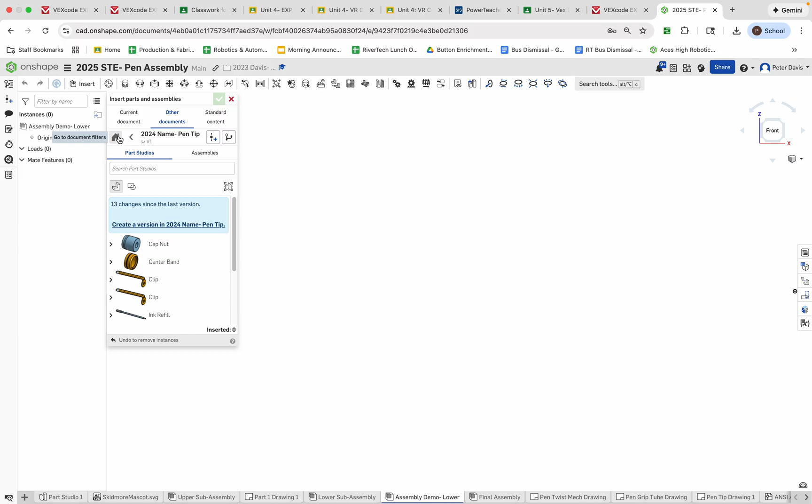All right, so I just called mine assembly demo lower. You don't have to change the name on it if you don't want to. First thing I want to do is I'm going to insert one of the pen parts. And so if you can't find your pen parts, you can always go back out to your home and you should see a listing of your documents. But if you're doing this in the same document, then it's probably going to show up in current document.

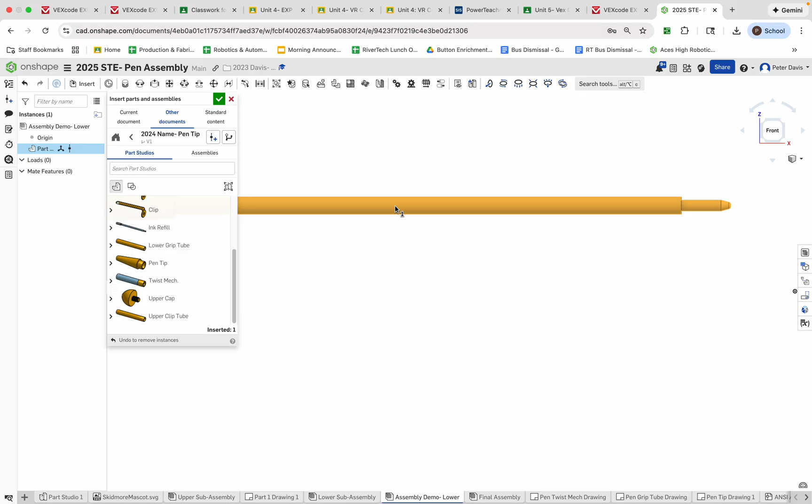So what I want to do is I want to pick one that's going to allow me to orient everything else around it easily. So I'm going to start with the ink refill as my starting point. Now, notice when I click on it, it automatically orients to the origin the way it was drawn. If I move my mouse over the design space, it would allow me to place it wherever I want. And that's not really what I want. What I really want is I want it to be oriented the way it was when it was drawn.

So if I don't move my mouse and click on anything, I can just go up here and hit check to automatically drop it. Now, as I mentioned a second ago, I can come back in here and I can grab this, move it, and that will kind of screw up my orientation for things. So I don't want to do that. I'm going to hit undo. What I want is I want to lock this to the origin. So I'm going to right click and I'm going to hit fix.

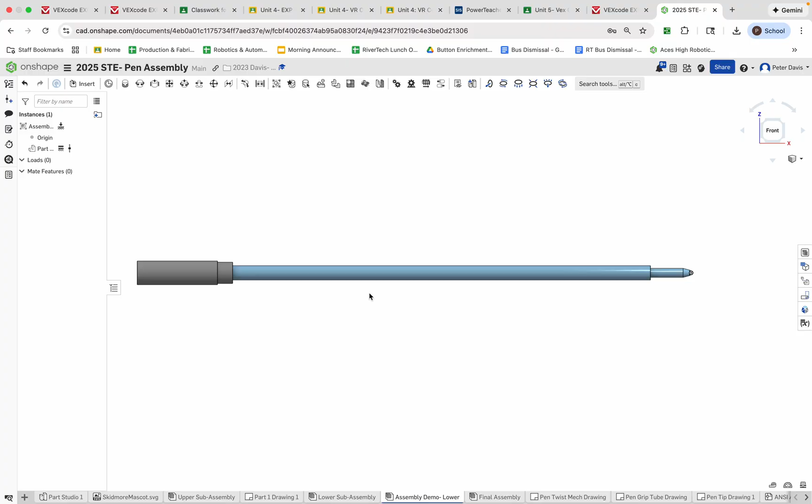So if you ever had any trouble getting normal looking front, top, and right side views because you were playing around in the origin and things got shifted and moved around, this is going to help prevent that from happening later. This is going to lock everything to the standard front, top, and right side that I used when I drew this originally. So now I'm going to bring in the rest of my parts now that I have that fixed. Again, right click, choose fix. If you hit unfix, you can always unlock it and drag it around. But in this case, I want to keep it fixed. And you'll notice the part is up here in my assembly tree and it indicates that it is fixed.

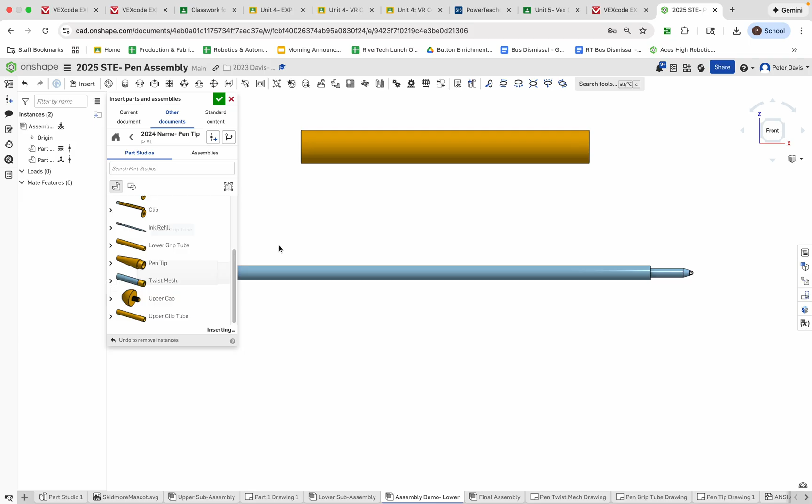So I'm going to go to insert again, and now I'm going to bring in the remaining three parts for this assembly. Okay, I'm going to bring in the lower grip tube and I'm just going to place it up there. I'm going to bring in the pen tip, place that up there. And then I'm going to bring in the twist mechanism and place that over here. And then green check. I don't care where those are because those are all going to automatically orient to this ink refill when I'm done.

The first thing I'm going to do is I'm going to take my twist mechanism, I'm going to click on it, and then I'm going to grab the triad and I'm going to move it to rotate it close to the direction that I want. Then I'll click off, then click on the pen tip. I'll do the same thing. Just get it close to what I want. Doesn't have to be perfect because again, when I start mating the parts, it's going to automatically align things. So I'll move that up there, move that up there.

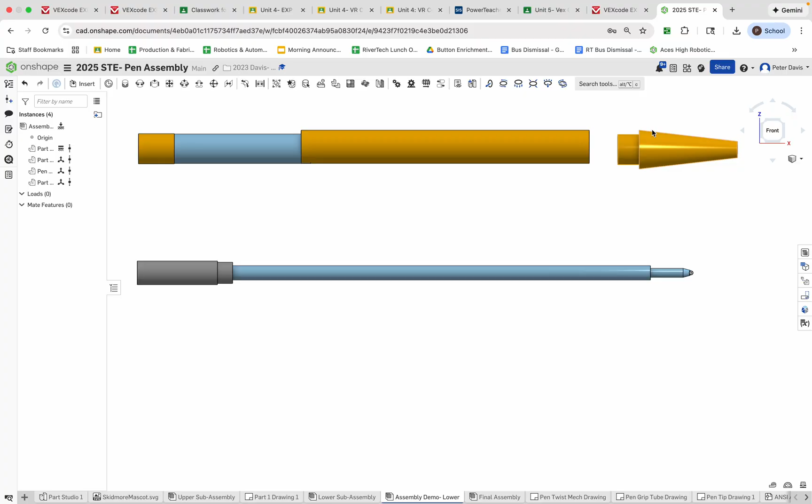And now I'm going to zoom in. I'm going to focus on the relationship between these two parts here. Okay, so I'm going to orbit a little bit. So I'm right clicking and dragging to orbit. And I'm going to go to my Fastened Mate.

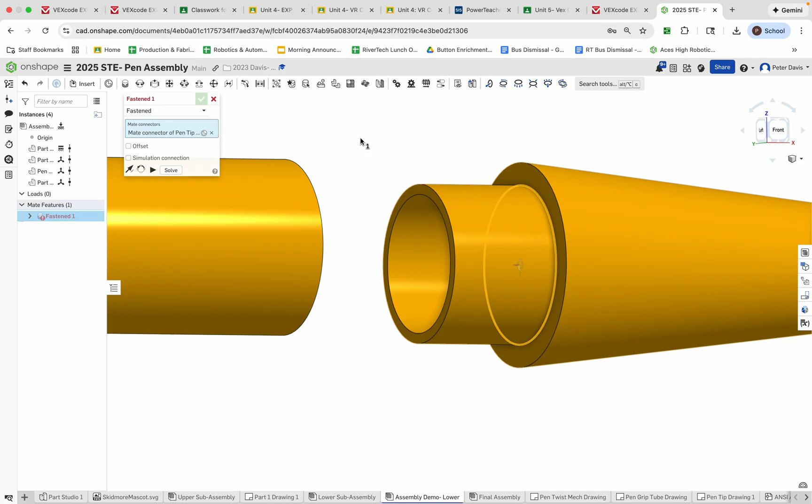So the Fastened Mate is going to allow me to assemble it so that this tube slides right up to meet this face. So I'm going to grab this inner edge here where this cylindrical face and this edge come together. So I'll grab that. All right, that's going to give me my first mate connector. Okay, you can see the mate connector down inside there.

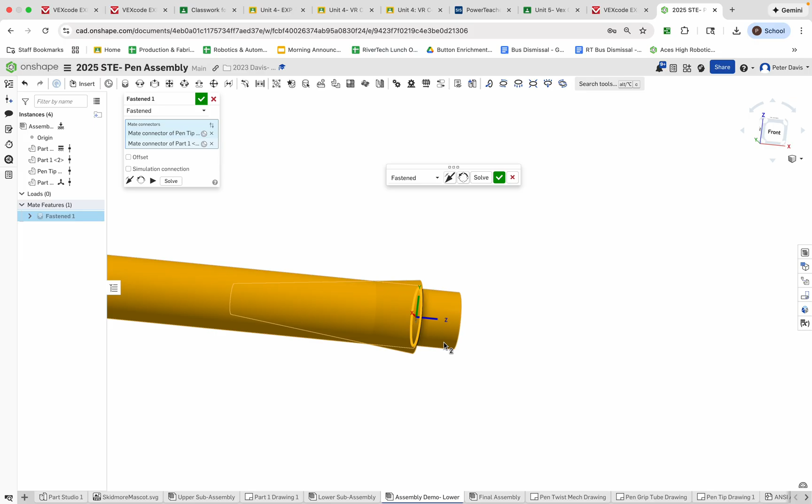Then I'm going to orbit around by right clicking and dragging. And I'm going to grab either of these two edges. Either of these two edges gives me the same center point. So when I click on it, it gives me that mate connector and automatically puts this together. Now, if you put yours together and the pen tip is facing the wrong way, so it looks like that, then you could click on this little flippy arrow here and flip what's called the primary axis, and it'll flip it around.

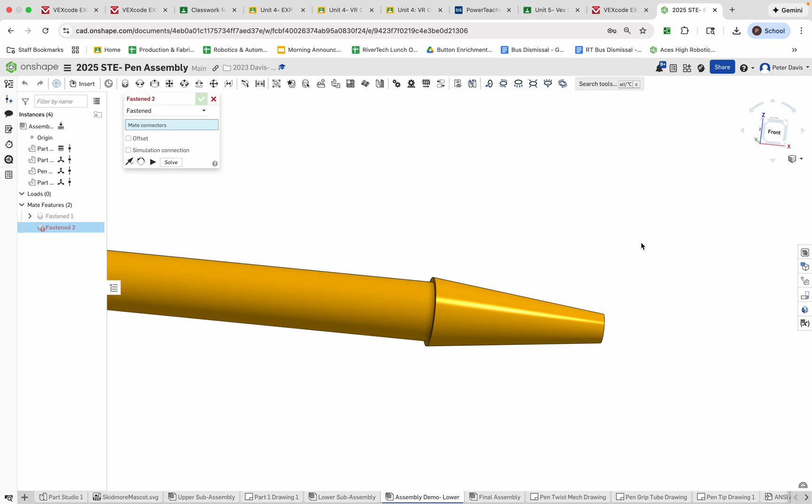All right, so now that one's done, but I still have other parts I want to make. So I'm going to green check here. If I green check up here, it's going to close the Fastened Mate window, and then I'm going to have to go back up and reopen it. So if I green check over here, it automatically starts the next mate. So for this one, I'm going to mate this face to this face here. However, I want them offset. When you assemble the pen, the twist mechanism sticks out.

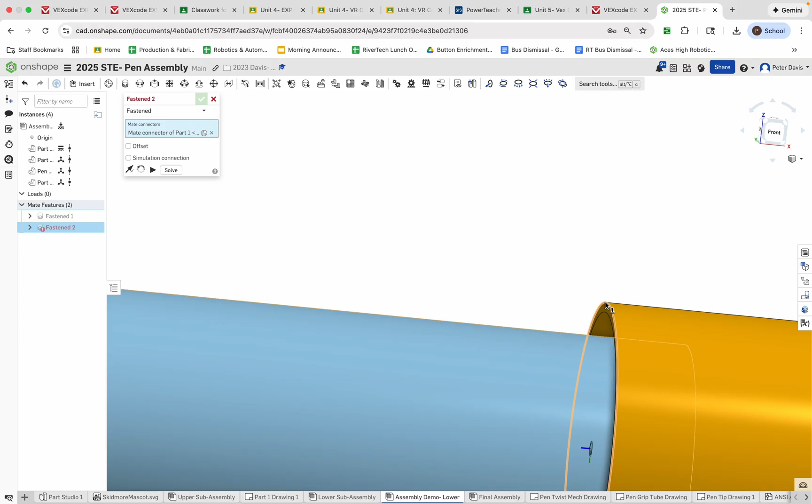So I'm going to grab this face here, choose the Fastened Mate by grabbing that edge, and I'll do the same thing over here. So you'll notice initially it sinks it flush, and that's not what I want. So in this case, when I use this mate, I'm going to do what's called an offset. So by applying an offset, and if you look, my y-axis is green, my x-axis is red, and my z-axis is blue. The z-axis is the one that's in line with everything. So that's the one I want to modify.

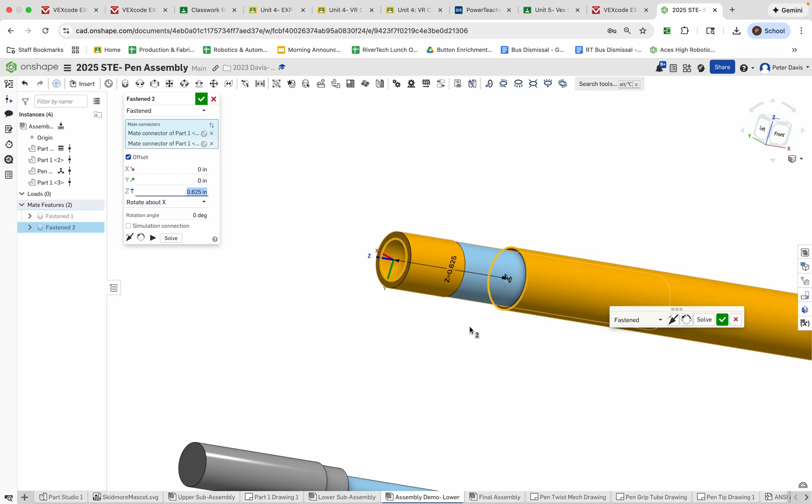All right, I'm going to change that to 0.625 or 625 thousandths or 5/8 of an inch. And when I hit enter on that, you'll notice it automatically extends this out 5/8 of an inch. So this face and this face are still locked in a relationship, but they're offset by a distance. In this case, I chose 5/8 of an inch. So now I'm going to green check to solve that.

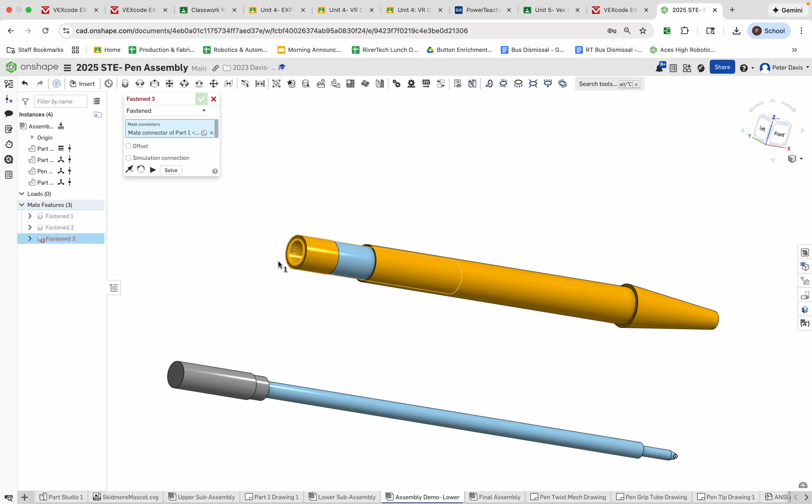So the last mate for this one is going to be mating this entire set of parts with the ink refill. So for that, I want to choose this upper edge. Okay, make sure I get that. There we go. And then I'm going to orbit. So I'm going to right click and drag and zoom in down here. That part on the twist mechanism threads over this and mates right to here. So I can choose this edge or I can choose this edge. It's the same point.

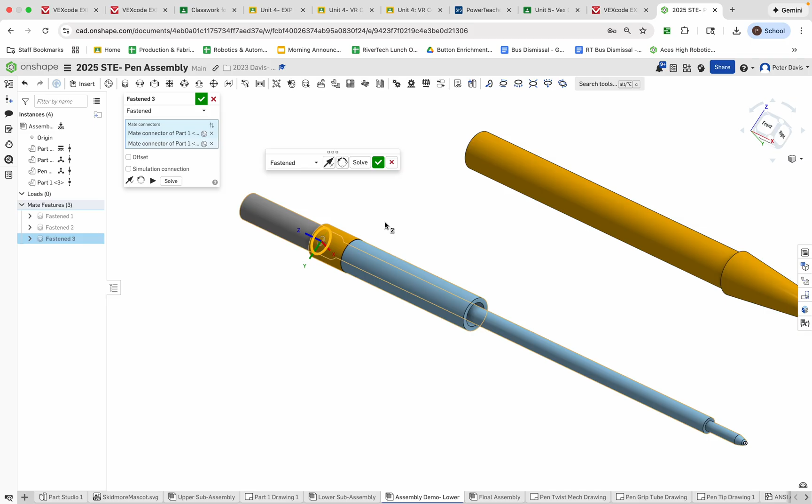Now, notice how when it gives me the preview, it doesn't show any of the other parts moving. And that's because OnShape only cares about the two parts that are involved in the mate right now. When I hit solve or when I hit the green check, it's going to finalize everything. But when you're first starting on it, it focuses on just the relationship that you're working on. So I'm going to green check. So now that that's done, I could close the fastened mate.

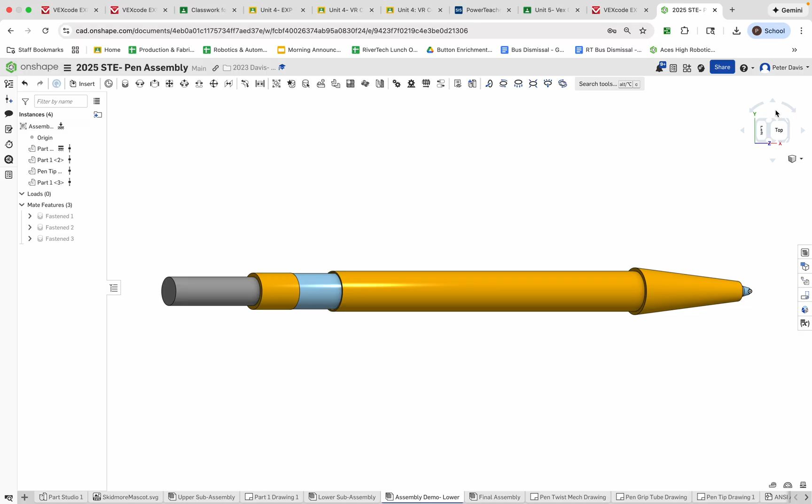And I'll put this in isometric view, which looks very nice. If you want to take your pictures of your front, okay. If you want to take pictures of the top, which isn't going to look any different. Or if you want to take pictures of the right side view, you'll notice it automatically orients everything perfectly because we locked everything to that initial origin.

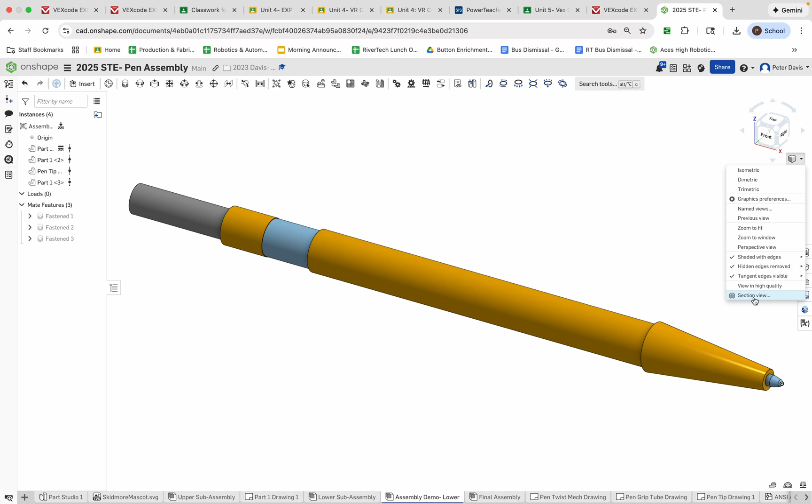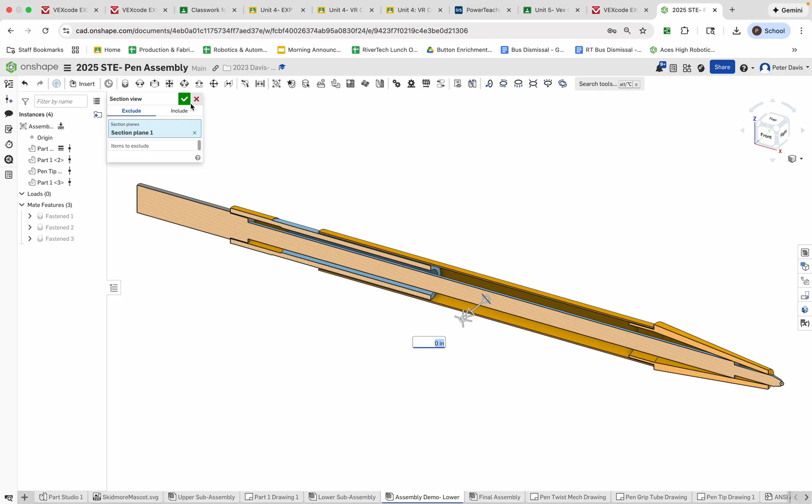Last thing I want to show you is how to do a section view. If we come to this little camera render options, we can come down to the bottom of this and go to section view. And when we do, all I have to do is click on any one of these cylindrical parts, and it's going to automatically generate a plane that slices through the middle of everything. Now, if I wanted to, I could grab this arrow and drag that plane out. But in this case, I want the cross section right at the middle, so I'll set that back to 0. So this is what it looks like with a section view.

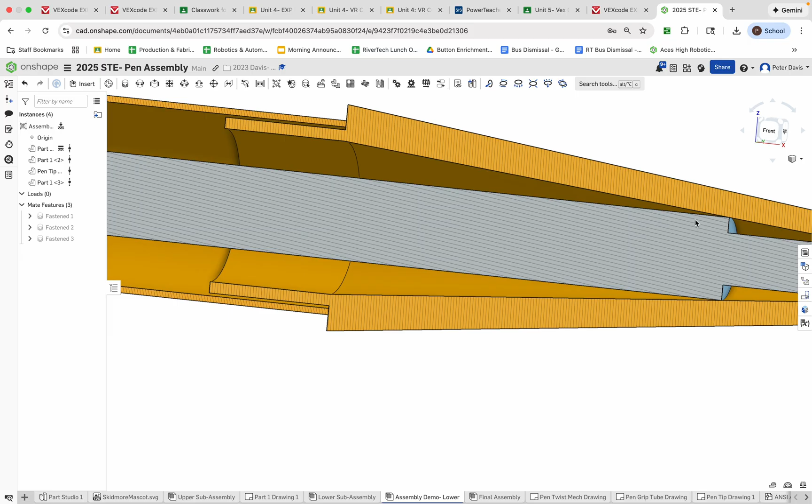The one thing I would want to inspect here is to make sure that the step over here where the ink refill meets the inside of the tip isn't colliding or overlapping. And in this case, you could see it's meeting it ever so nicely. There's no overlap. There's nothing highlighted in red. If you had parts overlapping, then it would highlight them in red.

All right. So that's the end of this subassembly. You can go on to the next one and do the upper subassembly. Good luck.